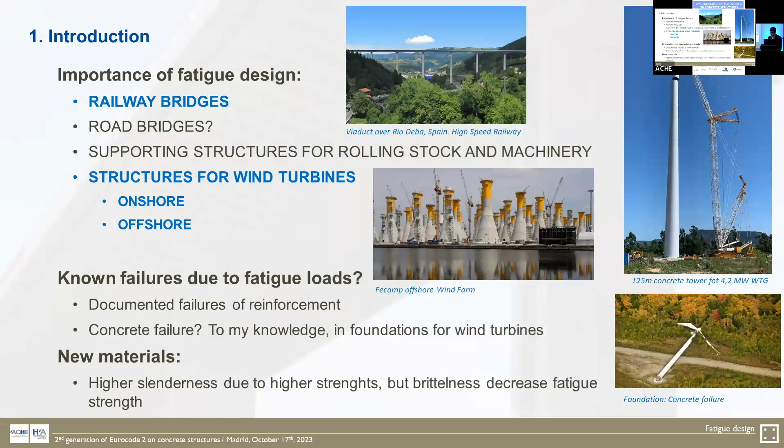And I think it is fair to mention that the fatigue provisions of the new Eurocode are not suitable for the design of offshore concrete structures, because they do not take into account structural concrete in water, humidity, which is widely known to be a reduction factor for concrete strength, and also the possible influence on the fatigue of the reinforcement. As a matter of fact, in some specific guidelines for the design of structures for wind turbines, it is stated that you need to use specific S-N curves for the reinforcement.

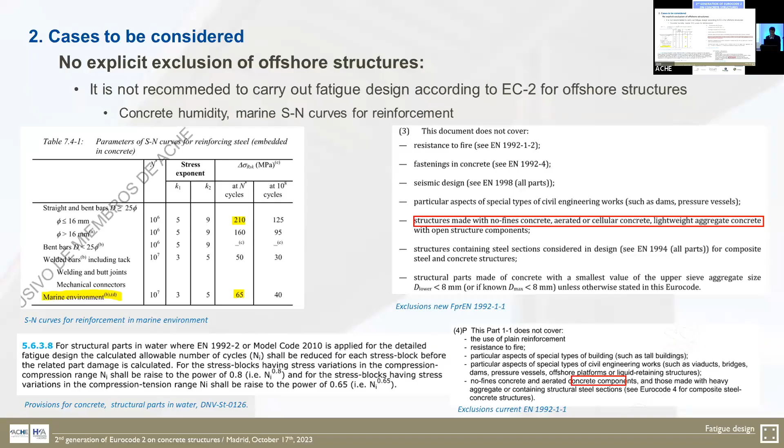Now, regarding methods of verification and combination of actions, we now have 3 levels of verification. They are not mentioned in the slides, but we have the simplified approach, which is quite suitable for small structures not highly sensitive to fatigue. We have the damage equivalent load, and of course, we have the Palmgren-Miner rule, which is now included in the general chapter for fatigue, chapter 10, in the new Eurocode.

This rule, which is a standard rule for a refined, accurate analysis of fatigue behavior of structures, is included in the current Eurocode in part 2 for bridges, but it wasn't included in the general part, so it was a kind of exclusion of its use for types of structures other than bridges.

Regarding combination of actions for fatigue, there is a significant change, because now the fatigue load combination is a quasi-permanent combination. Every other load which is not a cyclic load shall be considered as belonging to the quasi-permanent combination of actions, instead of the frequent combination of actions, which is the provision in the current Eurocode. So there is a slight load level reduction for the verification of fatigue design.

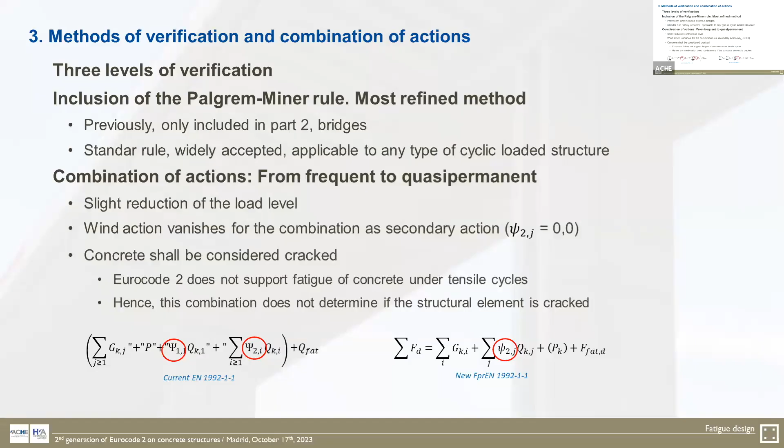But it is important to say that the current Eurocode and the new Eurocode do not cover concrete under tensile stress cycles. So you always need to consider the concrete cracked, unless it is compressed. You cannot take into account the tensile strength of concrete if there are fatigue loads, because Eurocode 2 does not cover this kind of fatigue failure. Now, regarding point 4, internal forces and stresses, this is related to what I just said: no tensile strength of concrete shall be considered.

There is another novelty which is important for an accurate assessment of certain details, especially for offshore structures when you have special joints, connections, etc.: the new Eurocode now takes into account the redistribution capacity of concrete under fatigue loads. This occurs when there is a stress gradient in the concrete, and it's widely known. It was in the Model Code 90, it is in the Model Code 2010, and in other codes and guidelines.

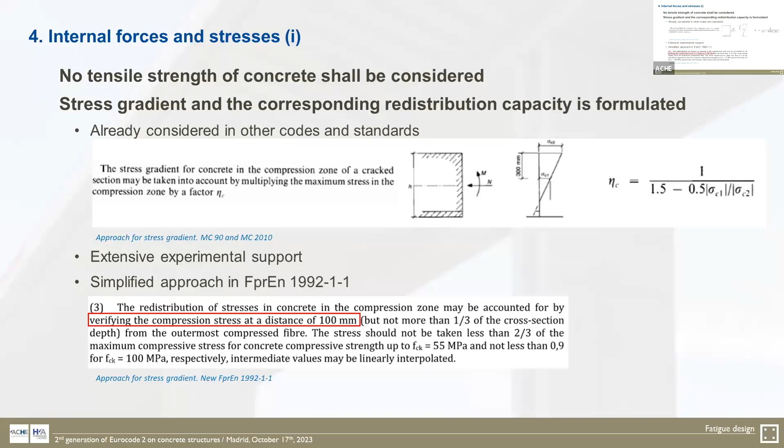It was proposed to include this approach directly from the Model Code 2010, but it was modified, and the provisions to take into account this redistribution capacity are very, very simple. You just need to check fatigue of concrete at a fibre 100 millimeters away from the most compressed fibre, which is a very important simplification.

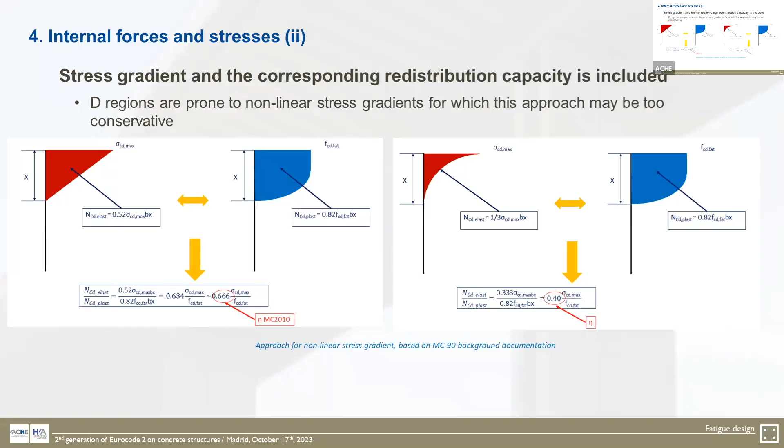Regarding reinforcing steel: for prestressing steel there are no significant changes, but for reinforcing steel there is a whole new set of S-N curves. There was extensive research by TNO in the Netherlands regarding fatigue of reinforcing steel, mainly non-welded reinforcement, decoiled reinforcement, and welded reinforcement. So S-N curves have changed for both non-welded and welded reinforcement.

For non-welded reinforcement, the diameter is now included. It is not included in the current version of the Eurocode, but now it is included. We know there is a size effect. And the number of resisting cycles at the knee has changed from 1 million to 2 million, which is a standard figure, for instance, for structural steel.

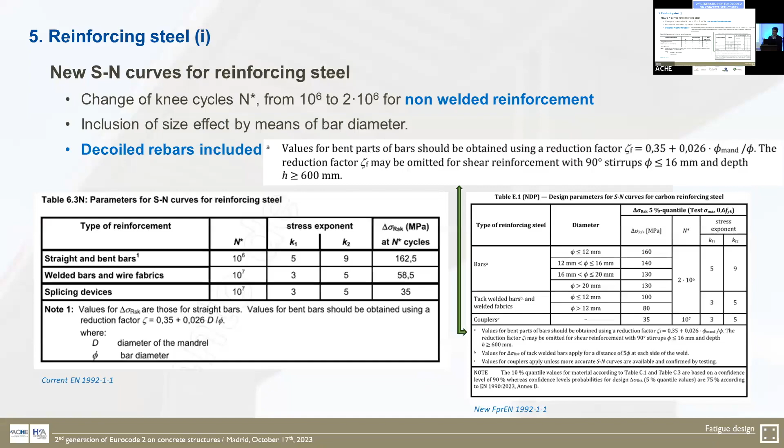We can see here the new SN curves of the new Eurocode compared to the current one, and you can see that the inclusion of the influence of the diameter has some impact, of course. For diameters lower than or equal to 12 millimeters, we have better SN curves. For larger diameters, we have worse SN curves than in the current Eurocode. And these curves include the decoiled bars, because it was important to study the influence of the decoiling of the bars, up to a diameter of 20 millimeters, which is the maximum diameter usually coiled.

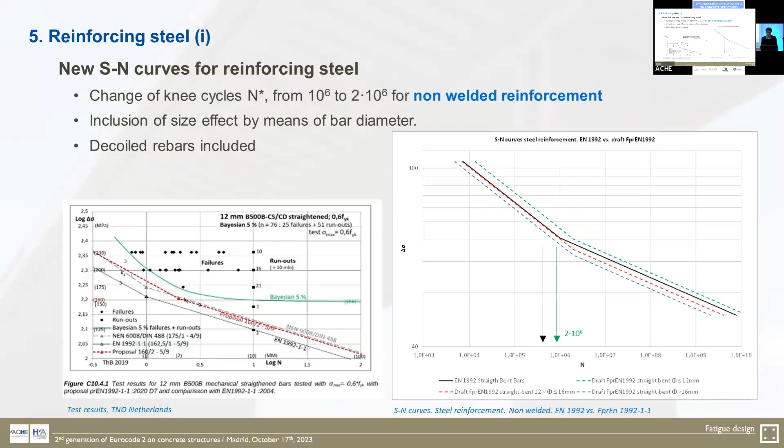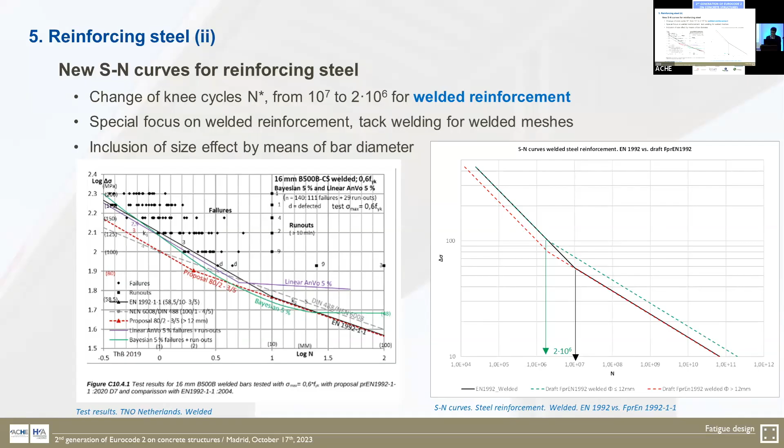Regarding welded reinforcement, there was this extensive research, TNO. As you know, welded reinforcement is more and more common, especially for precast elements and other kinds of structures. And the SN curves have been modified. For welded reinforcement, the number of resistance cycles at the knee has changed from 10 million to 2 million. And we can see something similar to the non-welded reinforcement. If you have low diameters, you have an improvement in the SN curves. If you have larger diameters, the SN curve is a little bit worse than the current Eurocode.

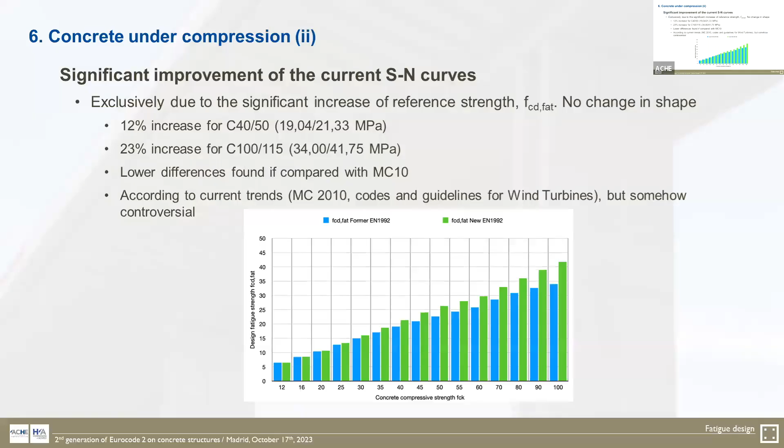Carlos, 2 minutes. Okay. Regarding concrete, there is a lot of controversy, but concrete fatigue has been improved a lot. Fatigue of concrete is a very difficult research topic. There are a lot of opinions, but now it's implemented. New SN curves that, as you can see here in this comparison, have improved significantly compared to the current Eurocode. But if we compare these new SN curves with the curves provided in the Model Code 2010, we can see that the change is very small. So I think we are covered.

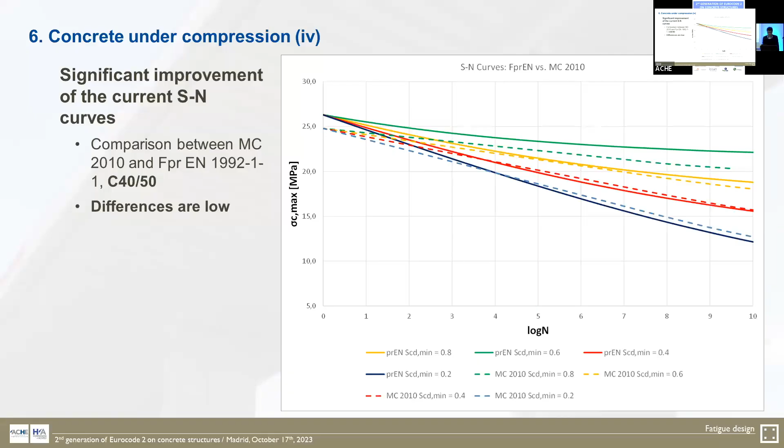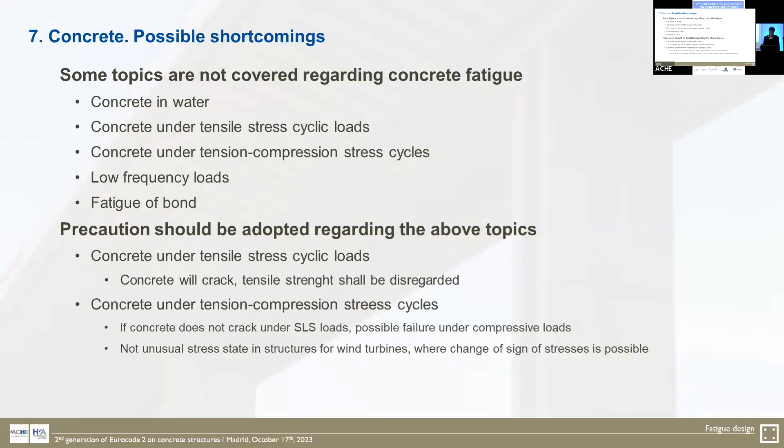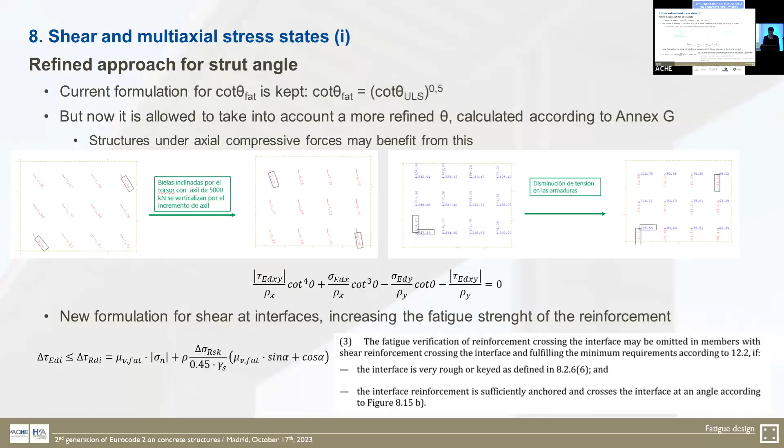And finalizing, because there is no more time, regarding shear, there are some changes. Now you are allowed to calculate accurately the multi-axial stress state, which is shear, because now you can calculate with the provisions in Annex G the inclination of the strut angle, etc. And this way you can avoid the simplified formulation that is kept in the new Eurocode, but doesn't have a rational basis. So now you can do that. There is a formulation for shear interfaces, very favorable. You can avoid checking reinforcement and concrete strength at shear interfaces if you comply with several provisions. And now there is an open door.

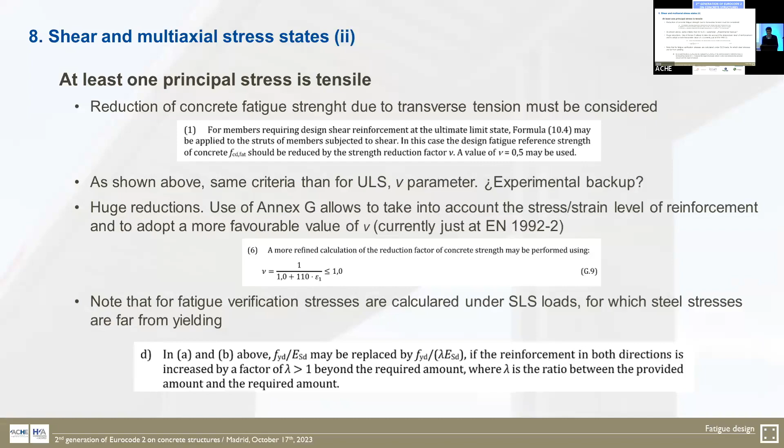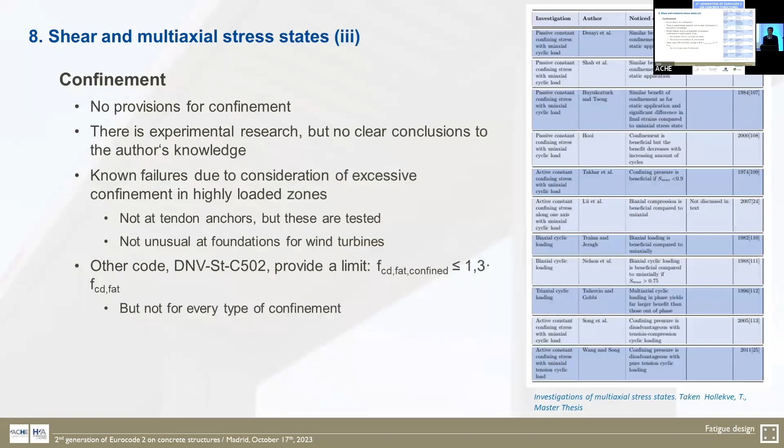To check thoroughly the multi-axial stress states in concrete, 3D stress states, because now you are allowed to take into account the softening of concrete, etc., if you accept that concrete under fatigue loads and multi-axial stress state behaves in the same way as under static loads. Confinement, more or less the same, no provisions for confinement. We need to be careful with confinement. There have been a lot of failures because of considering a huge confinement equal to that of static loads. Carlos, we need to finish. Yes, and bridges, no significant changes at all.